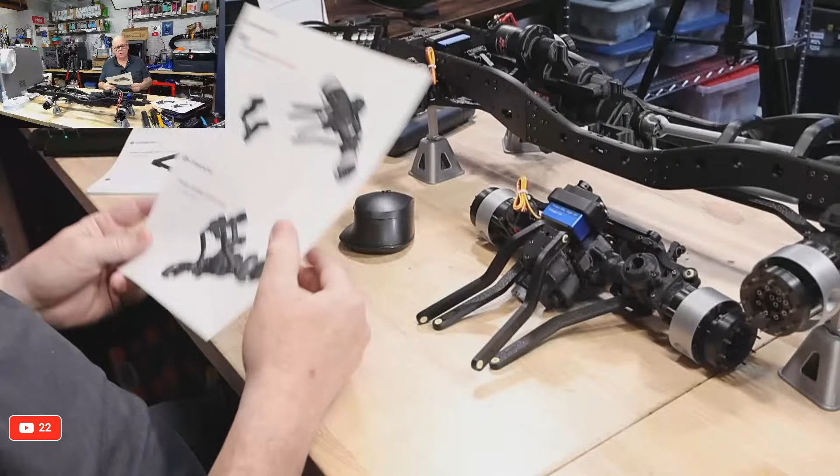Nitwits assemble, yes, let's assemble, let's get some assembly going. Okay, so let's get this camera in place. I've made myself a bit of room, I've cleaned up a few things here because we are going to need room. I was going to bring my Lazy Susan thing from home and I totally forgot to get it, but not a big deal. Okay, let's get the camera over to this one. There we are, we are on page 365, so we are at this point where we are doing the axle installs.

So we've got all this built up to this point. We have the third set of wheels here, and this little thingamadoober piece right here that we're going to attach to these doomer-hickey rods on these little swivel wheel things. So we got all those swivel wheel things done.

You didn't miss much, really. Plus you can always, you didn't miss much, trust me.

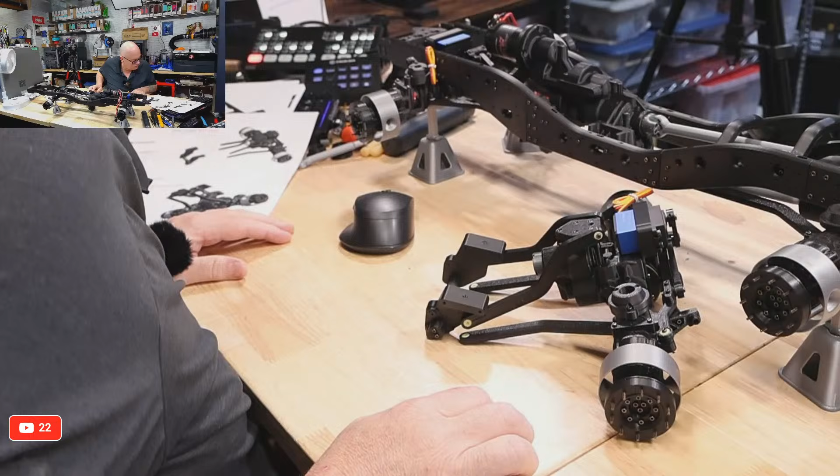Okay, here we go. So this is going in here somehow like this, and then we need to attach using M2x12s. We're putting this one thing underneath, and it's going to go on here.

So I need some M2 by 12s. Oh, I need to get some M2 by 12s out. We're almost out of them here. Let me just put some in my tray. These are 16s. Where's my 12s?

25s, 10s. Sure, it's going to be the second last bag I pick up. You watch. Yeah, of course, second last bag.

M2 by 12s. Let's put some more screws in our tray here. Is the overhead camera going to be better for this one? Let's just check. Yeah, maybe the overhead camera's a good look for now. So we'll dump some screws in here.

There we go. Okay, I'll take an M2 by 12 and my drivers are here and here.

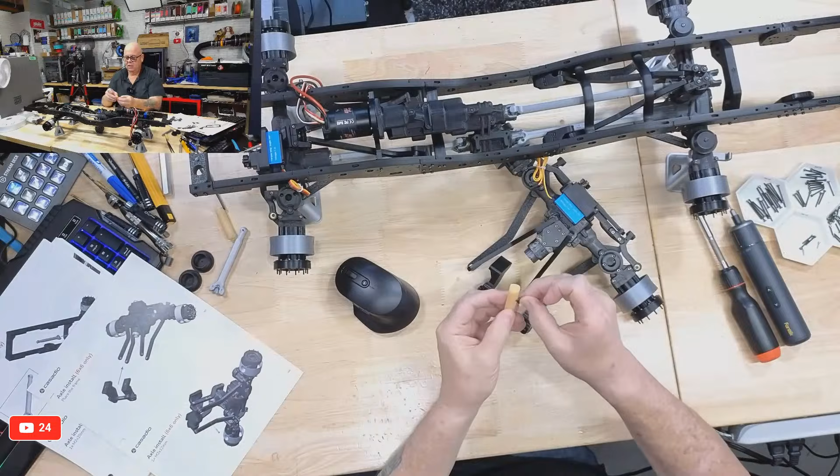There we go. I brought a little wax stick home from the office to see if it'll work. It's the same stick that's used to lubricate the drill when you're drilling holes in paper.

Okay, so this is going to go through here. Oh, I forgot to turn this on. I got something else for this, let me know if it's too loud, but let's see if this is any... there we go. Let me know if that's too loud. I just figure it's better than silence. And I shouldn't get demonetized because it's AI.

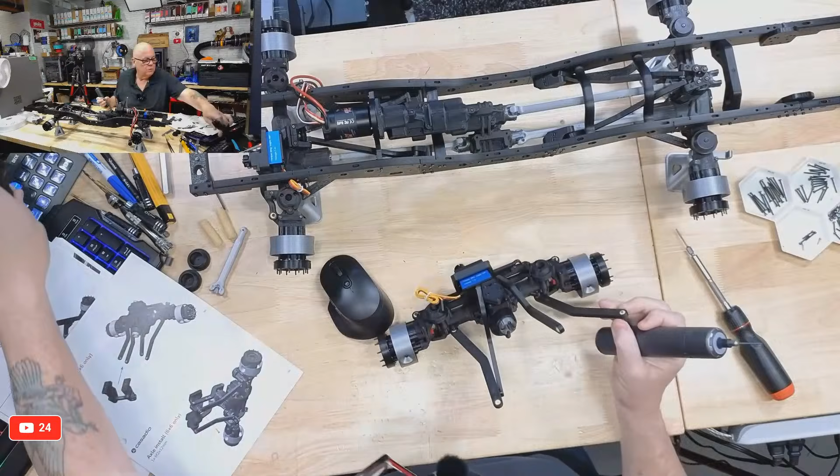Okay, up through there. And we're going to come up through here on this one. Okay, right here. Oops, come on, let's switch over to this camera, might be better. There we go. I should have multiple camera views on it, but that's okay.

Okay, and then it looks like this one is going to go onto this side like this. That's an M2 by 16. Oh, I got to put some 16s in the bag here. Still got tons of these 16s left.

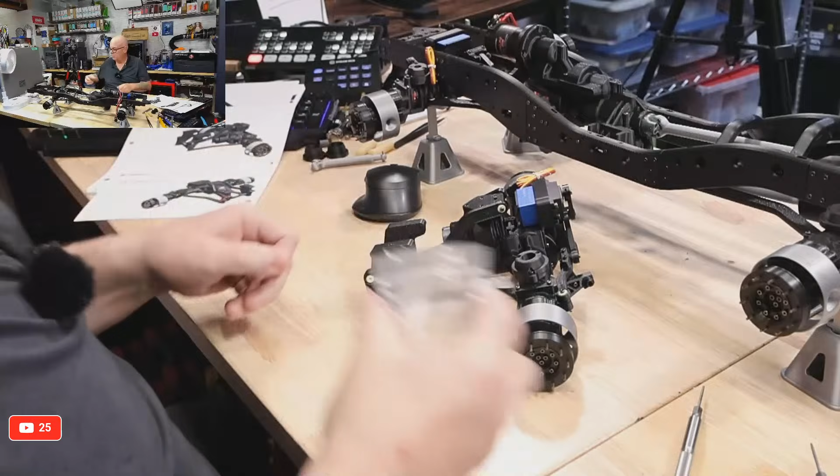Who is this guy? This is me. The new me. The new me.

Okay, 16 millimeter in here. Make sure we hit the hole. There we go.

Whoops. Doesn't appear to be going in. Let me just back this out. Make sure we're going in straight. There we go. That's better. Well, or is it? There it goes.

There we go. That's all in there. We got movement. That's good. Okay, and I think we're going to repeat for the other side. Same thing. Okay, so 12 on the bottom.

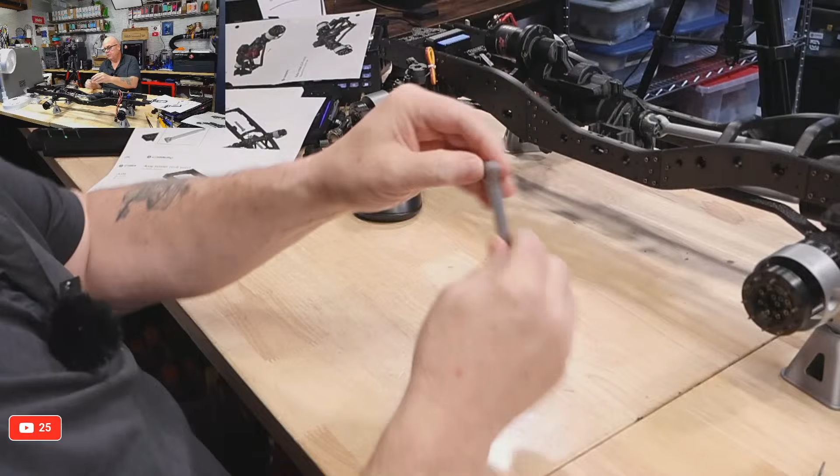reinforcing screw there, which is also going to be used to actually turn it. Okay, so I'm going to get this guy. Let me zoom out if I can on this. Oh, there we go.

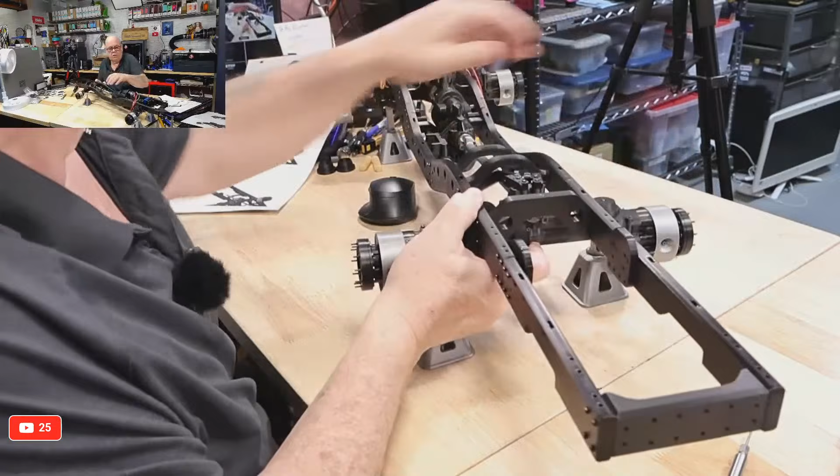Okay, see? So I got to be careful picking these up because these are only held on by a little bit of area. So we move this here. So we're going to be putting the drive shaft onto this

portion here. So I got to turn that so I can see it, and then the drive shaft is going to go. Make sure I get this hole lined up. And I need to make sure that when I put this in, I am in line with the hole, and I am.

Okay, so we need an M2x20 right here. It's got 3D printed jack stands. Yes, it does. Hey, Nick.

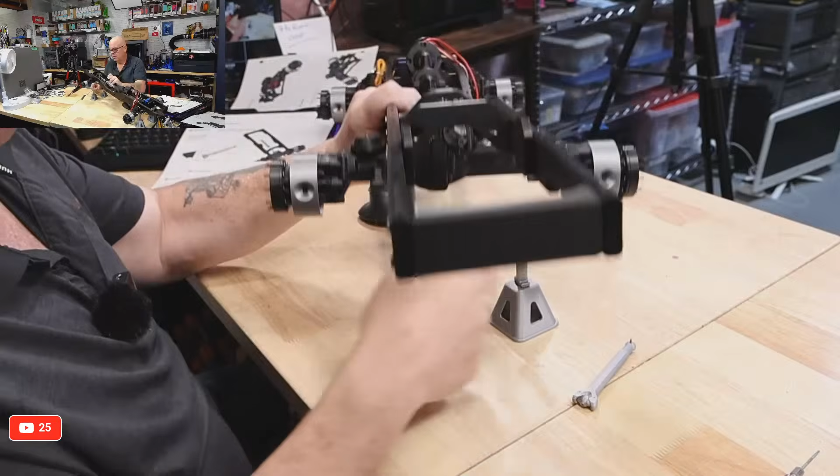Yeah, so basically what I'm doing is if I lift this up, we are attaching the drive shaft to this drive, this hub here, which is the same on the other side, basically, yeah, you get the idea. Okay, let's get this through here, started.

Okay, we got that started in there. It's just a tight squeeze through here, and then we just got to make sure that we have a little rotating nubby piece here. Just got to make sure that that is in proper lined up position. Right about like that, and this should work.

Come on. And I think it went nicely through the hole. Yep.

Perfect. Now we'll just tighten that by hand. Perfect. So there we are. There's the drive shaft in place, just like that. Okay.

Just move that off to the side a bit. So we put the drive shaft in, we've screwed it in.

Now we're going to insert the last set of wheels up, and it looks like we are going to join them with 2 M2x20 screws on each side. And that'll be through these points right here. But we're also going to have to make sure that we have the drive shaft in line. The drive shaft is going to go into this slot here, so we got to make sure that's lined up as we screw those in.

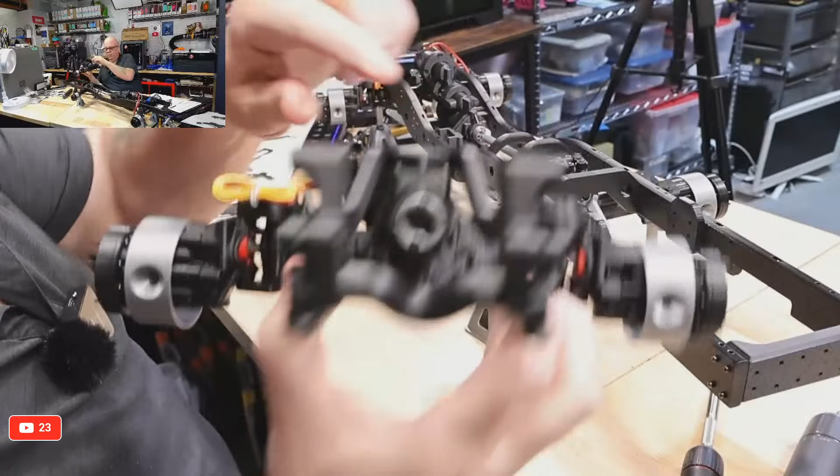So I'm just going to pre-drill, and I've learned this from past experience. We're going to pre-drill these holes. Finished your MOC build a couple days ago, you ended up breaking one. Oh no, breaking one 1.5 bit with your electric screwdriver and also stripped another. Oh wow. Yeah, there's a lot of screws.

So these holes here, we're gonna just make sure these are nicely drilled out for the screws. Okay, and I'm gonna do the same on the other side. I'm gonna come through here, through this one.

There we go. Okay. I wonder if the overhead's going to be better maybe for this. Yeah, maybe the overhead camera will be a little better on this. Whoops. As I say, I'm running out of desk space here, so I'm stealing some real estate from up here. So let's put these jack stands back on here and on here.

There we go. You can just see this a little better this way. Okay. Should have pre-drilled. It helps to pre-drill because then the screws are going to fit through much easier, I find. So we're looking M2 by 20s, and I just like to make sure I get these ready and in place on this side. And I've learned this lesson from putting these other two on. Get these kind of pre-inserted into the holes.

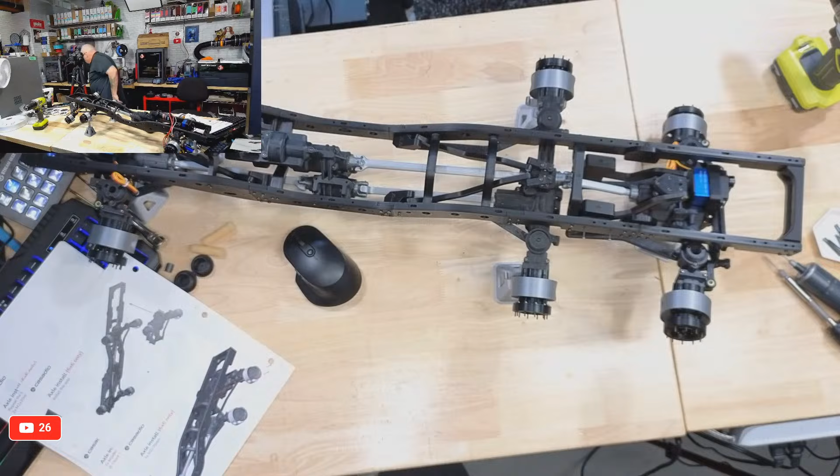Maybe this box. No, not quite. What else do I have? That with this, let's see, this might work. There we go. Everything's just collapsing here.

Okay. Hey, Tuxedo. Yeah, I need another jack stand. Okay, so this is a good height right here.

Now, just gotta line this hole up. Once I get one going, it's all gonna line up nicely. So that's gotta come, there we go. That just had to come back a little more. And get this hole lined up here. And that is lined up.

Okay, get the other hole lined up, which I believe it is. Nope. Too high, too low. Maybe right there. No.

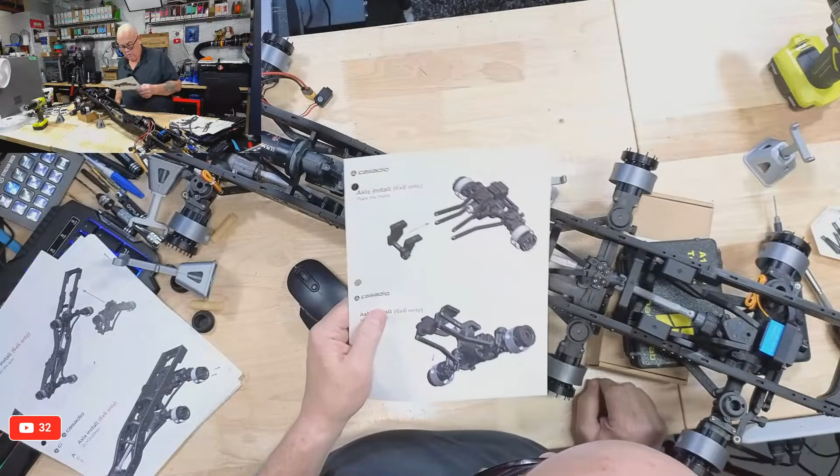Yes, okay, I got it, it's all put together right. This just takes patience. Extra bench space, yeah I know. I could, if I come over here, actually if I move this camera over a little bit that way.

There we go, here let me just angle this better. Oh, wrong way. And if I twist it, wrong way. Let's just do that for now. Okay, I just got to get these back holes lined up.

Where are the... okay, I just got to see something here. Okay, you know, I was off too low. Okay, I was lined up, but I was just too high. Okay, let's do this again.

Patience is key here, trust me, because I'm like, this should be fitting better, but la la la. Patience is key, and you don't want to rush anything, you don't want to break anything. Okay.

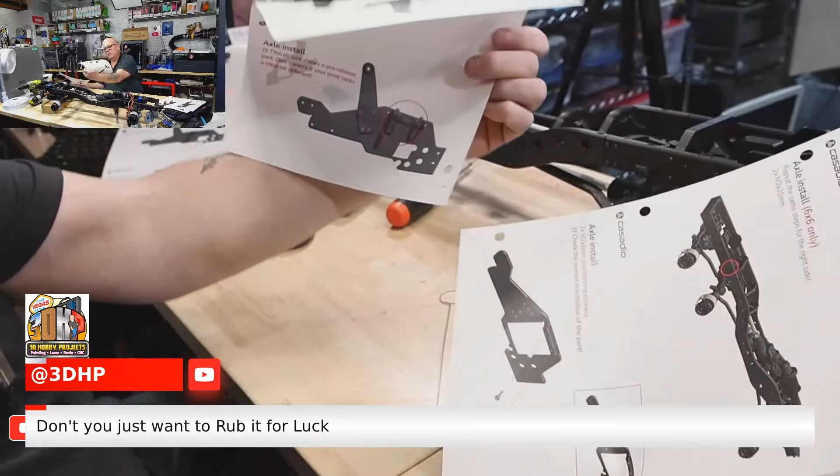We're doing some more fun stuff. So here's what we're doing next. We just finished this top part by putting that last portion in. Now we've got to do, I'm not even sure what this is, but looks like we're assembling, getting another part ready for assembly. So that is going to be in the next bag.

Where is the next bag? Is that this one? The bags seem to be in their numerical order, but the parts that I'm getting are not in the order that they're put in the bags. So what's my next bag in sequence is going to be 30. Yeah, the next bag is 30 and 31, 32. Okay, 30, 31, and 32.

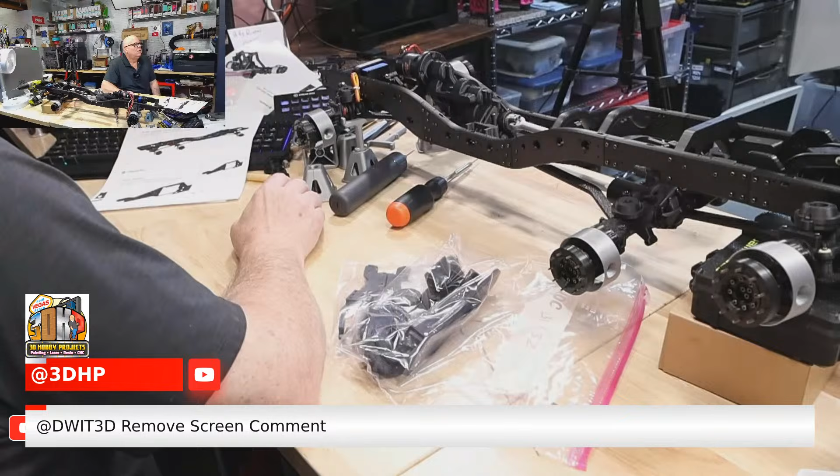Did I leave a pinned post there from Jerry? How did I... I think my mouse just accidentally hit that. I don't even know where that is. I think all I gotta do is show another one to get rid of that. There we go. There we go.

My arm injury, my arm, it fatigues very fast still. Yeah, so my arm injury is still an issue, but hey, I got my MRI scheduled for February 2028, so go figure. Our medical system leaves a lot to be desired.

Okay, we have this piece and this piece from bag 30. Bag 30 of about 100 bags. You gotta be kidding, right? Okay, so it looks like we're gonna work on this piece, and we're probably gonna do the same for both, but anyways, M2x8 reinforcing screws. M2x8. So we're going to do the same on both because I know it always says repeat for the other side.

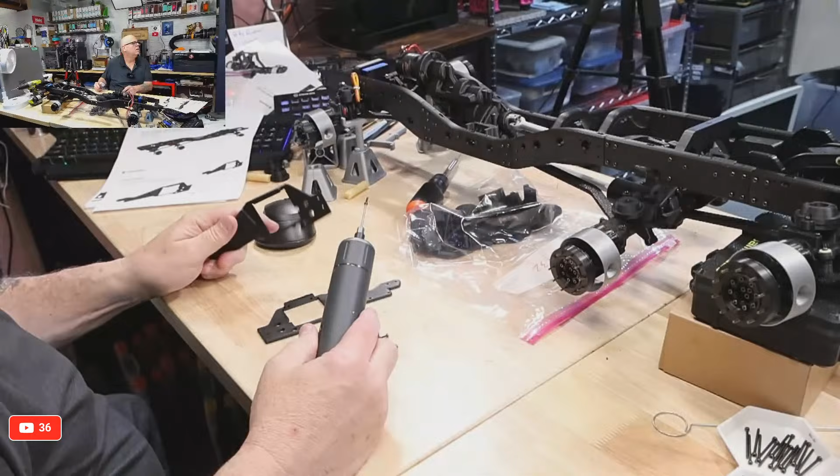They do take a while. Yeah, I agree with you there. That's funny.

800 Northern bagels to make and deliver tonight, tomorrow morning. Shall we see who finishes first? Hey, I think your bagels are going to be done first, Deanna. I really think your bagels will be done first.

Okay, we'll just do the same. I know it's going to say repeat for the other side. Let's see. Follow the same steps for the right side. Yeah, exactly, so we're just going to skip ahead and do that. I love the fact that we put reinforcing screws in the areas that are going to be under stress.

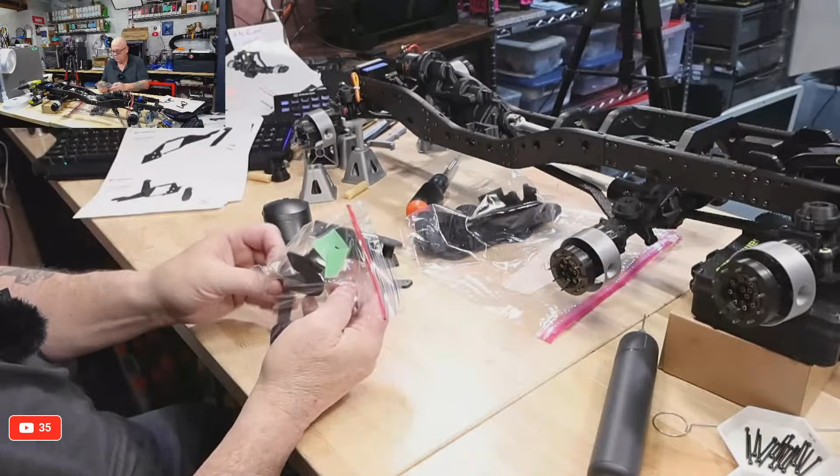Let me see. Okay, and then we have another piece, axle install. Where is that, in bag 30 or was that in bag 23? That was in bag, no, it's not in bag 23. I don't know what bag 23 is for. It seems like we skipped right over bag 23 and on to bag 30. I hope I didn't miss a bag. Can you imagine?

Okay, this is bag 31, 32. So the pieces we're looking for in here are this one and this one. We've got a little bit of, okay, so these are M2x20s. So we'll need 4 of those.

These are going to go opposite side into which holes? Oh, I see those two holes. There's two specific holes they're going into. Okay, let me just make sure. Yeah, I don't need to pre-drill these. These are already easy to get through. So it looks like it's the middle hole and then the middle hole that's on its own. So right through here.

And before I tighten that, that one goes right into here. Okay, and we'll mirror that on this side. So if that looks like that on that, that is going to go that way on this side.

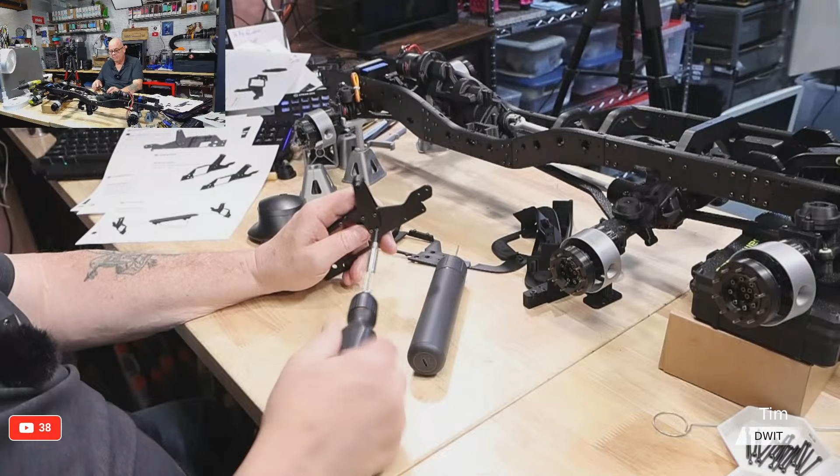Slow, long stretches. Yeah. I've been doing some stretching, not as much as I should, but I use my arm a lot at my full-time job, and it gets so fatigued. Lifting rolls of material, cutting things on the table, installing stuff over my head. My arm gets a lot of workout, but not much chance to rest. Even just these little things like I'm doing right now, the fatigue eventually sets in. And this left hand, oh my gosh, I got carpal tunnel in my left hand. And I refuse to get surgery. So I have a pain cream I use for it. And it gets fatigued a lot. It's not bad now just holding things like this, but sometimes I lose my grip strength, and it's my dominant hand on my phone too, which is I think why I got the carpal tunnel in the first place.

Okay, so that's a mirror of that. I think that's exactly, we got the mirror of that, so that's actually the outside. Okay, I think we're good there. Now we have to take this bridgey looking piece, which is this piece here. Check the correct orientation of the frame. That's not the right piece.

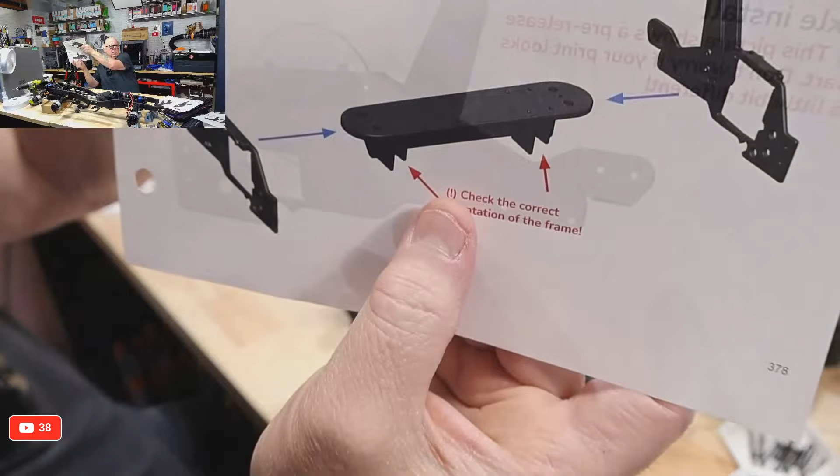At least that doesn't look like the right piece. I wonder if there's a different one. If you look at the instructions, this piece has two bigger holes with a smaller hole in the middle. This doesn't have any holes like that at all. So I have a feeling there might be another piece.

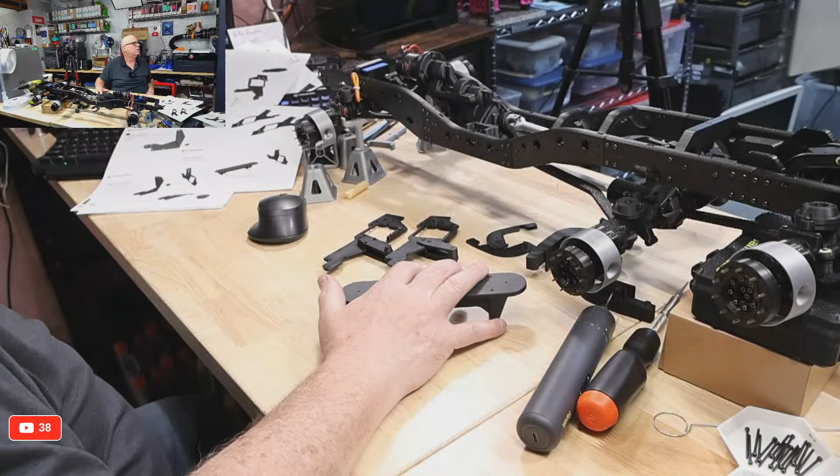Oh, repetitive holding the phone, definitely. You have to go back and print quite a few parts. I was missing some parts, were hiding and turned up. Yeah, I'm hoping that, well, there's one piece here. This is in the same bag, but it does not look like the piece that was printed. But then again, there was a switch to some of the pieces, and this just might have been one of the pieces that was switched. Because why would this piece be in that same bag as those?

So we're checking the orientation, because this is the exact piece, but it's just the holes on the top are different. No, this is different. Well, let's just look and see if I have another.

Let's just look and see if I have another piece. So this piece is different than the piece that's showing in the instructions. And I have a feeling... I just want to check and see if those holes are key.

That middle hole is definitely key. Oh, I see, I think they've changed it a little bit. That's what it looks like, because this is basically the hole that these things are going to plug into, and I believe it's for the springs. That's going to plug into that. I just want to make sure if those outer two holes are being used for something.

I'm just going to quickly check. Yeah, I'm going to just quickly check to see if there's another piece in the bag similar to this. Make sure you use your knees when lifting them up. Yeah, no kidding.

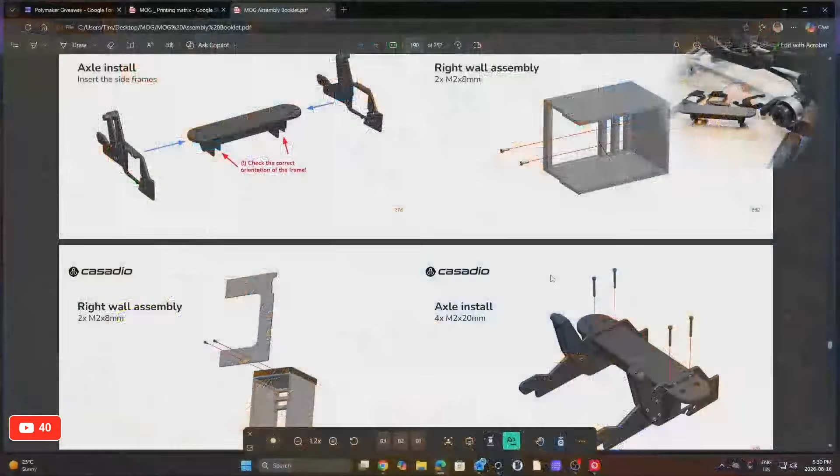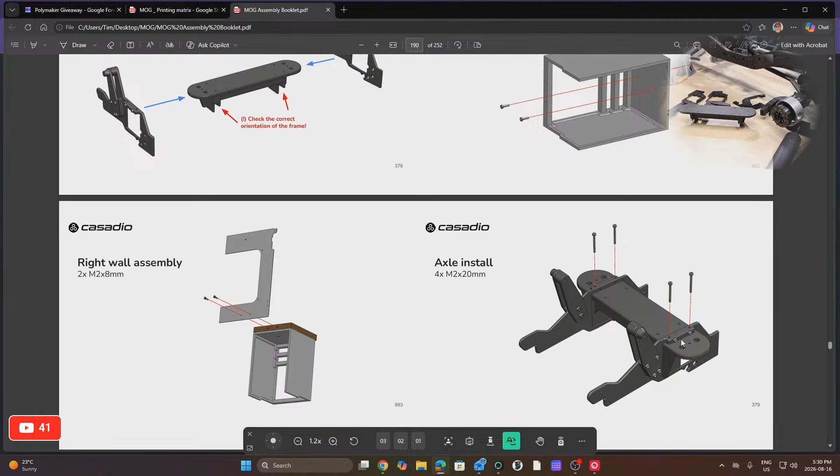Okay, so if I go onto this display here, so you see the part, there's the step I'm at right here. So you see this part they're showing here, it has those two larger holes with a hole in the middle. And then right here again, two larger with a hole in the middle. Let's get back to here. And I'm pretty sure this is definitely not the same as that part at all. So I'm just going to check the next bag and see if that part is in the next bag.

No, I don't see another one like that. No. Let me just check the build plates. Yeah, let me check the build plates and see which bag it was in, the one I'm looking for. That's why I keep these open while I'm doing this. So we go back to this, go to the build plates.

That's 31, which I'm on right now. At least I think that's 30, the one I'm on right now, 31. 30 and 31, yeah, that was in bag 31. Now prior to that, there was nothing that looked like that part. Now let's move ahead a little. And I don't see anything else that looks like that part. No.

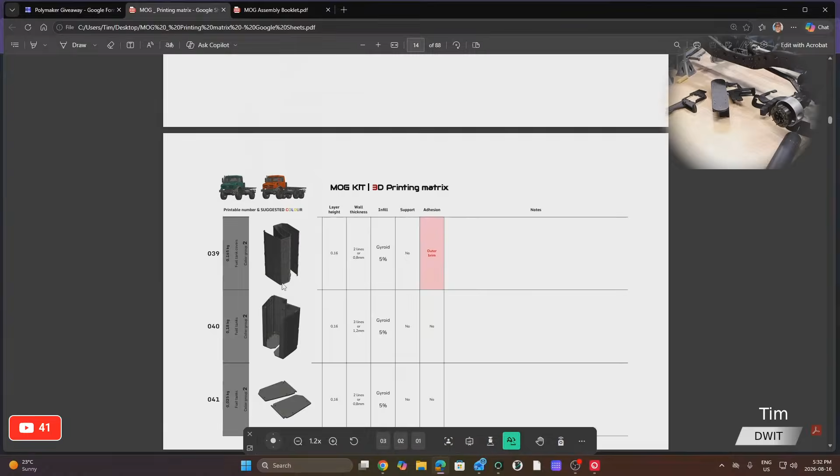Now we're into the body of the truck. So that's got to be the different part. Nothing there, nothing there, nothing there, nothing there. That's the one, bag 31 right there. And even that picture is showing the two larger holes.

But again, they did make some modifications to the model afterwards. And I'm just going to check back on these other ones to make sure. No, so that's definitely got to be the replacement piece, because there was a change. If you downloaded the models before a certain date, you had to update them, and that's probably one of the changes. Okay, so I think that's going to be the right part. They just made a modification to it for some reason. At least that's what I have to assume.

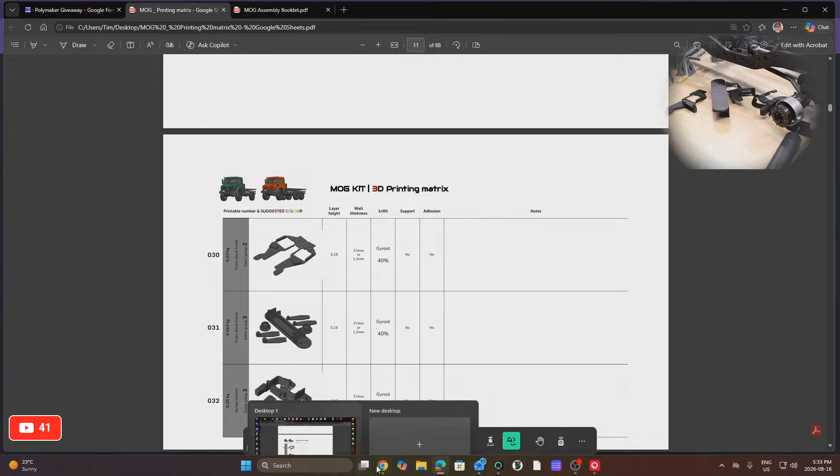Yeah, it looks different than the picture, but you think it's the right one? Yeah, I think that's going to be the right one because there's no other frame pieces similar to this. So we're going with this. We just got to make sure the orientation is right, which is this way.

And we have... which one's going where? So this one's going on this side, and this one's going on this side. Okay, fair enough. We'll go with this and see what happens.

We're going to screw that in with M2 by 20s, four of them. So this is going to go on which holes? This is going to go on the outside holes. There's two sets of holes here too on this one, whereas in the picture... oh yeah, it's the outside, so the inside. So we're going to put this on the outside holes right here.

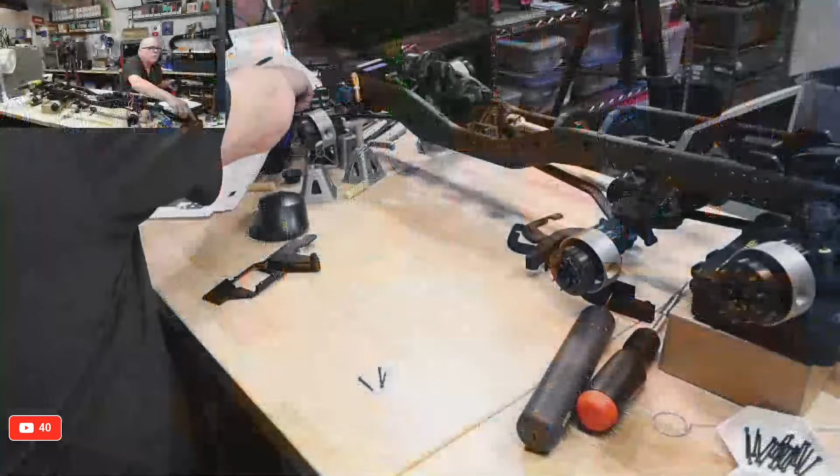Okay, let's get the camera back over here. Here we go. Okay, that's got to be right. We're going to go with this. It has to be.

If I'm wrong, I'm wrong, and I'll admit that I'm wrong. It's probably one of the modifications.

Okay, and this next one just goes on here.

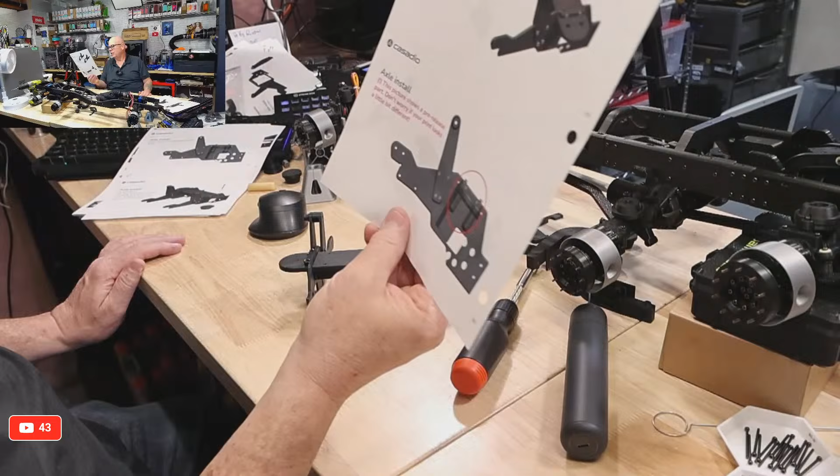Okay, so that's these pieces done, and it says this picture shows a pre-release part. Don't worry if you're... you know what, it really helps to read instructions sometimes. This picture shows a pre-release part, don't worry if your print looks a little different. I was worried my print looked a little different, and it's telling me not to worry. Okay, that was kind of funny.

Basically, it's a giveaway for you. Yes, there you go. Check the correct orientation of the frame, which we just did. So there's what they're showing on top, and there's my frame right there, and the orientation is correct. We have the little bump with the bump-out circle thing and the doomer thingy circle bump-out thing.

Okay, now we're going to put these little bubble things in. I'm pretty sure these are the things holding the springs, attached with M2x20 screws. The long screw gives you the possibility to mount some risers to adjust the preload according to your needs. So M2x20s go down through here, and that's going to go into here. Whoops... into here. Come on. Oh, that's poking right through. There we go.

Pretty sure I didn't... I'm still panicking. Well, not panicking, because I've got bag 23 here, and we're on to bag 34, and we haven't used bag 23 yet. I'm like, did I miss something? I'm going to have to zip back through the instructions a little bit here. I'm nervous that I missed something, but I don't know, my gut tells me I didn't.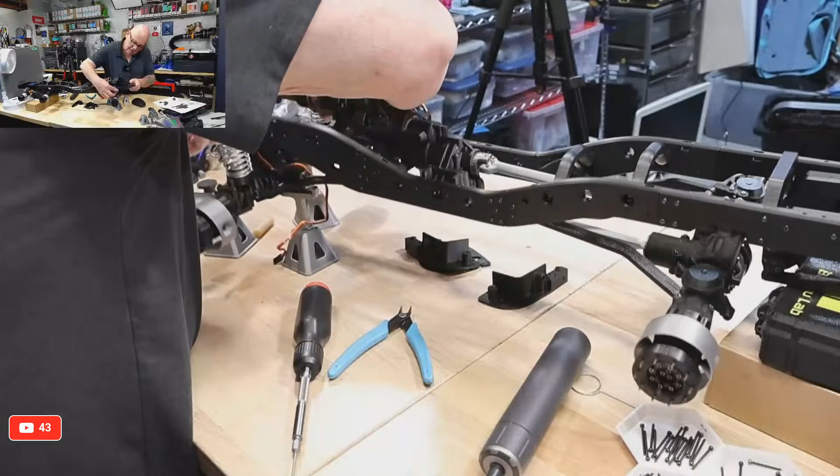Come on, separate. There we go. They're pretty decent springs here. Okay, so compress the spring. There we go. Let's do the other side. And there we go, look at that. There's the shock absorption on that one. Cool, very cool, okay.

Axle install. So we're going to do similar for the other side now. Okay, I can move this aside for a minute. Now that we got the springs in on the back, I assume that's the back of it. Or the front? I have no idea. Because we got a motor, I assume it's the back, but if it's rear wheel drive, then this would be the front. Okay.

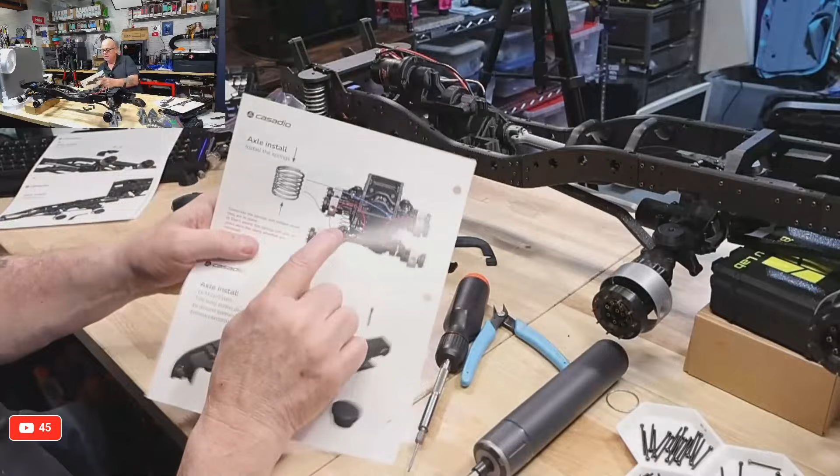So now we need this part and this part. We are now onto, so we put the springs in, right in here. And we're now onto this part down here, which is the axle and the long screw. Gives you the possibility to mount some washers to adjust the preload.

Yeah okay, so we're going to be putting the same thing, 20mm screws into some more spring compressors. These are probably for either the middle or the back ones now. So we have this and this one, and 20mm screws again. You're going to have to put some more 20mm screws in there. And this is going through this part here and into here, like so.

It's starting to come together a little bit now. I'm excited.

Weaponize the MOG. Well, considering the highest class they had was 3 pounds, I think the MOG would be a little bit out of its weight class.

Although they did have, why does that look like it's crooked? Oh, because that is crooked. Okay, they did have a 3 pound one, and it's basically maximum 3 pounds. So they had a 3 pound one, and then they went up against 3 one-pound class robots, and the 3 pound just killed the 1 pound ones, you can imagine, because it had some pretty good weapons on it.

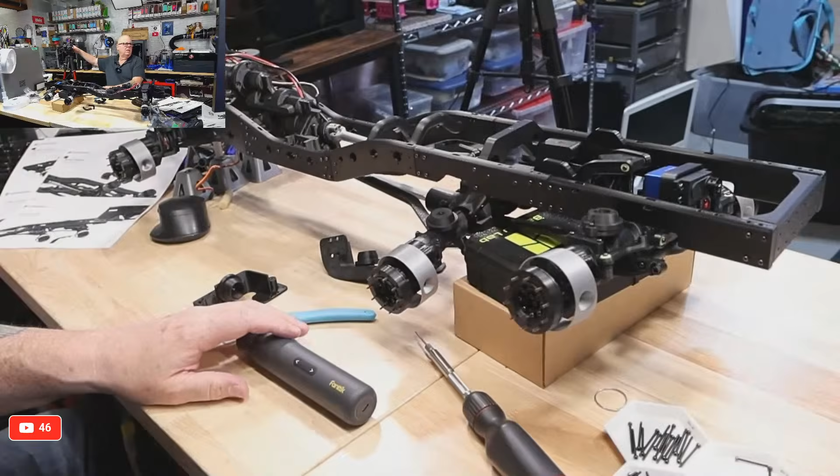Let's move this up again a bit so we can all see this. We're going to have to do both sides. Here we go, so this is going to be right in here. The 4 screw holes are right here. Now let's get a different angle on that. Here we go.

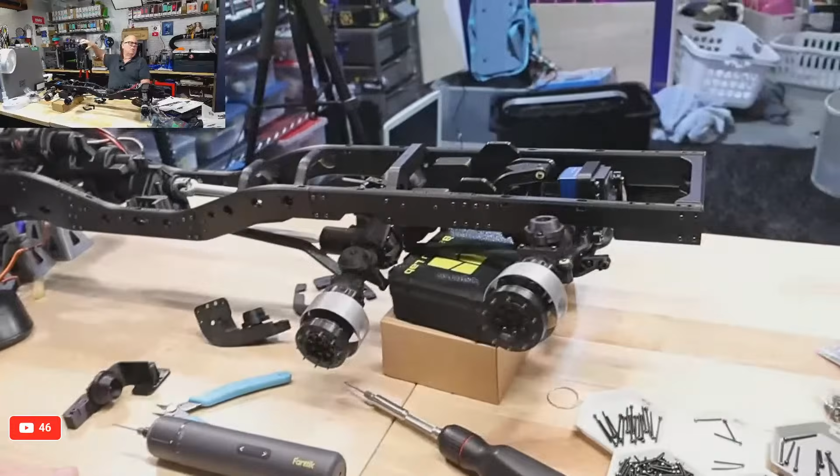There we go, so this is mounting. Let's just make sure I get the right one on the right side here. This is going to go on here just like that. So again, that's where the other springs are going to go, is right in between here. Okay, so that is with M2 by 12s, 4 of them.

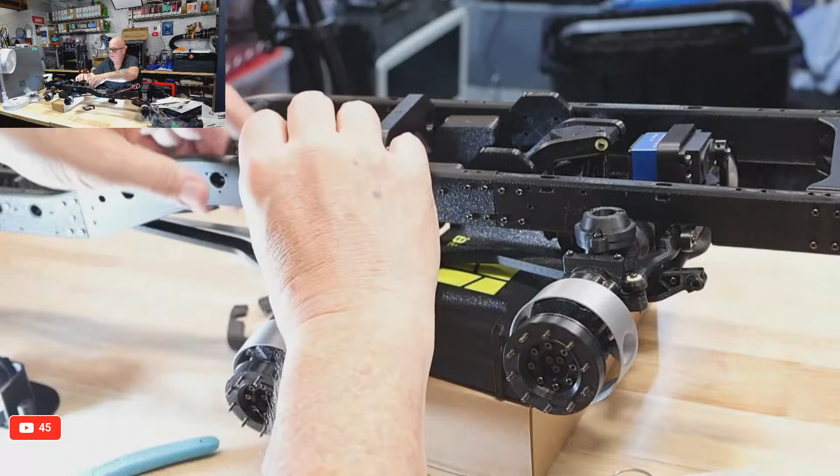Come on. Let me lighten that up a little bit. Yeah, hang on, hang on a minute. There we go. Right there. Come on. There you are. Okay good. Just had to get it started in the hole there. Okay.

The alien abduction lights, are flamethrowers allowed? Well, I think they might have some minor rules against some of those things. But hey, you know, can't hurt to try. I definitely want to get involved in it, but I need to. I have probably most of what I need here to build one, but I would not know where to begin to design one. Now you can get kits, but they're not cheap. So maybe one day I'll save up and get a kit and enter the competition. What the heck, it would be fun.

Oh man, that's hard on the arm. Is it lining up straight? Yes, it may not look straight, but it is straight. Well, it's lining up to the holes. I mean, everything is lining up to the predetermined holes. Oh man, that's hard on this arm. Okay, let's snug these. I have to use my other hand because, oh well, no, I just have to suffer through this. This arm is getting very fatigued.

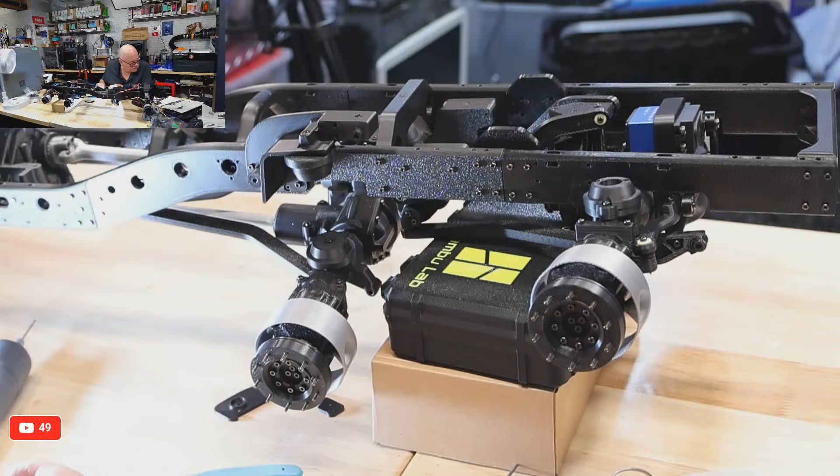Okay, now I'm going to get that one going on there. Now we have these guard pieces here of some sort, so let's see what this is. I know we're just going to have to repeat for the other side. And then this, install the plate.

The plate goes - oh, this plate goes just like this and over here like this. Okay, I see, so there's a plate that goes on the side here.

That gets put in with M2 by 12s. Same thing, 3 M2 by 12s. And then we're just going to obviously repeat the same on the other side. Okay, so let's get these in.

Just think of how long it took him to CAD all this stuff up. Holy crap.

Okay, and this one. Okay, and let's just snug these.

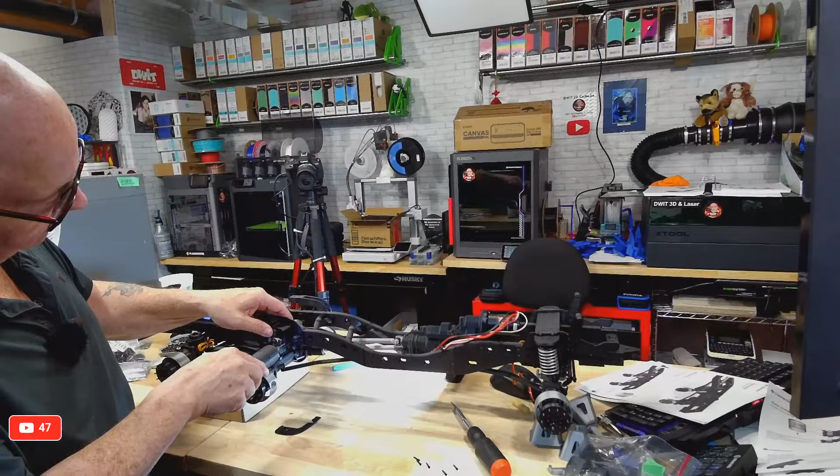Well, I haven't charged this thing all week. I've been using this thing all week, still haven't charged it. This is definitely a great little screwdriver.

I think I'll write to them and say, listen, you need to sponsor me. And they'll just laugh at me. They'll say, yeah, we know it's a good driver.

Okay, now we got the little bumper. It's going to go on right here. Bumper, guard, whatever they call it. Oh, wrong one.

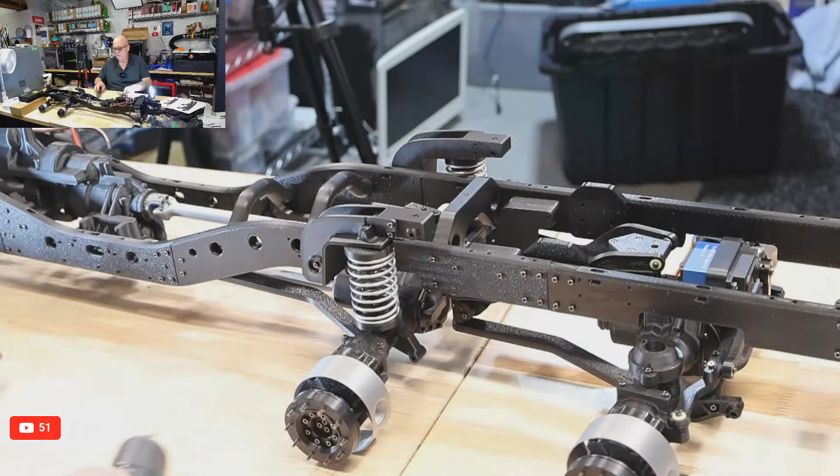Let's go back to this one, and then we can basically get the springs in there. Let's take this off these jack stands now that we got springs. There we go, and we're going to put the other spring over here. There we go. Oh yeah, you can see how that's going to be nice and - you know what I'm trying to say. Okay, cool.

Let's turn that off for now. Okay.

Hey, Matthew Maury, hello. Just looking at the Bambu tool changer patent filing. Very interesting stuff. Oh, I haven't seen that.

Haven't heard about that. Do you have any plans for where you'll first drive this truck, Tim? Probably on the front sidewalk outside my house, or maybe down the back alley where there's a dirt road so it can test the bumps. It's a non-paved alleyway at my house, so maybe back there. Something like that.

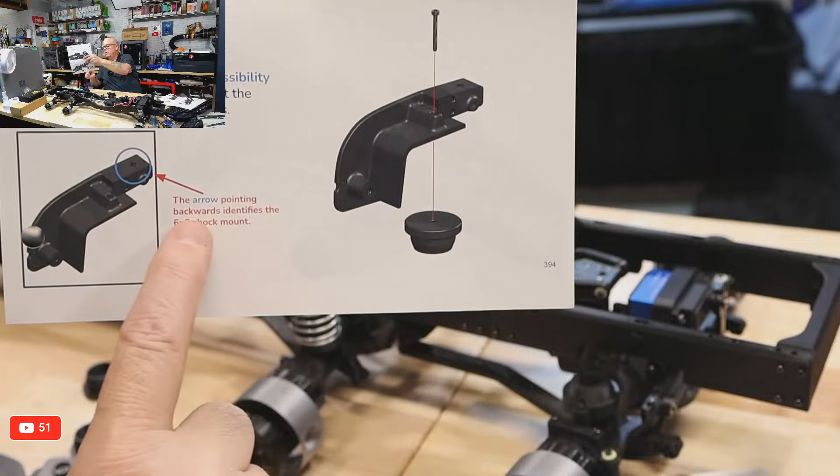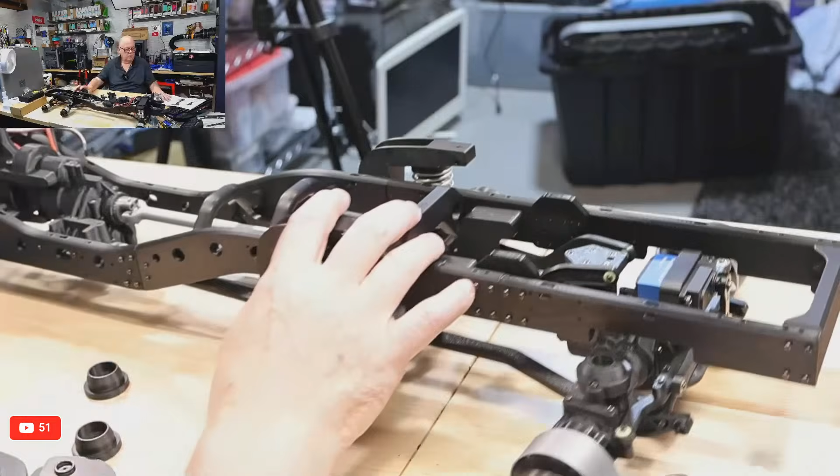Okay, so now we're on to page number 394. We're going to be installing these with the arrow pointing backwards, which identifies a shock mount, which is the back. So we're going to be pointing these to the back and putting M2 by 20s in here, same thing as we did before. We'll zoom this out and do the same thing. M2 by 20s, gonna have to pull a couple more of those out. This goes through this hole here and into these shock mounts.

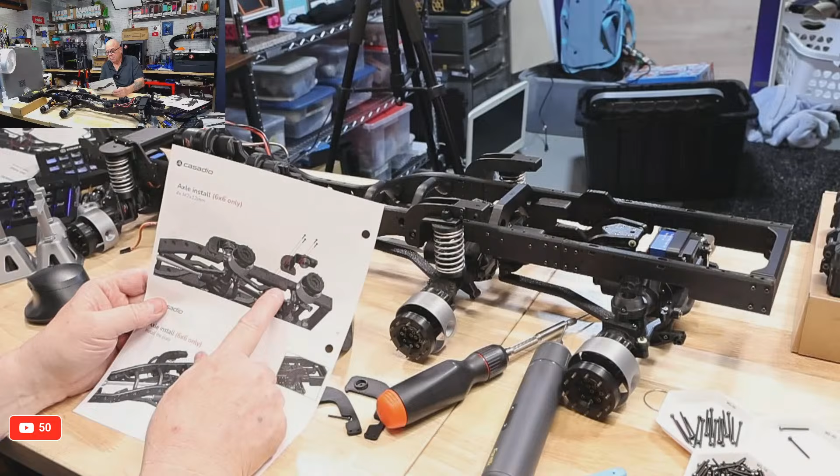Okay, so that's that. Now we're going to mount that with 4 M2 by 12s on the back, on those 4 plates right back here. So those are going in. Let me put my cheater light on again so it's easier to see. Here we go, come on, there we go. So those are going to go in these 4 holes right here. Okay, so we need 4 M2 by 12s. Let's get the first one in here. Come on, so this is going to go in that one.

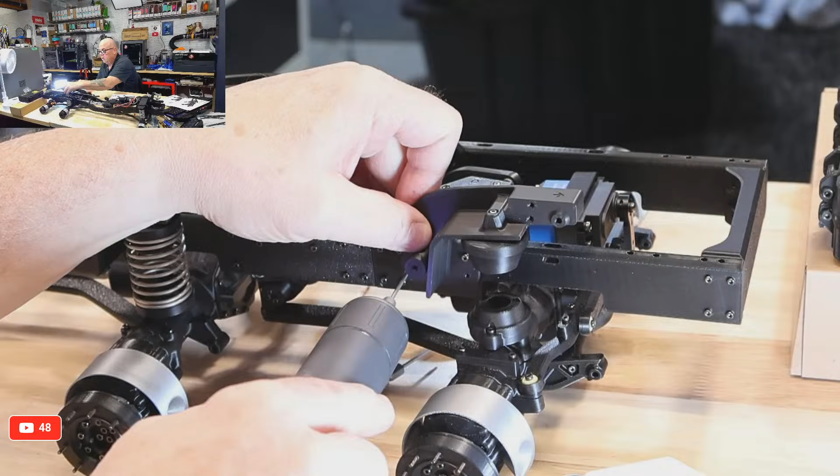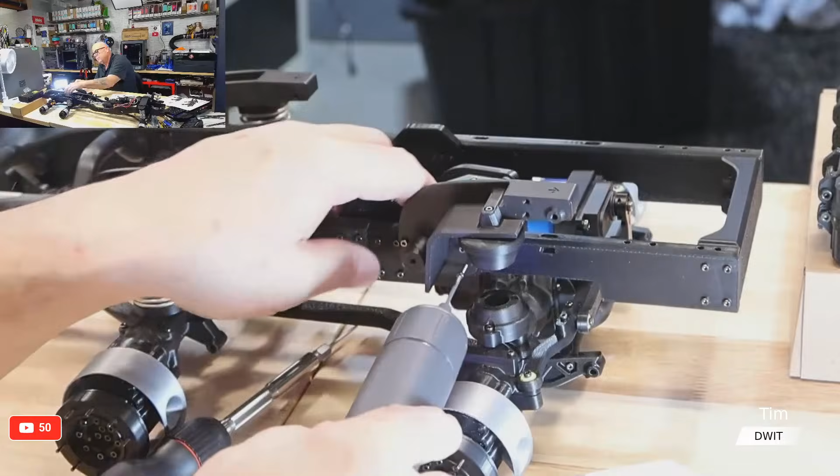And that's not a 12, that's a 16, that's a 20. Whoops. And as always, hand tighten these so I don't strip any plastic. This entire thing is screwing into plastic, there are no heat inserts at all. Can you imagine if you had to put heat inserts in all these things? Oh my goodness, you'd be going nuts. Now we again have this little cover that's going to go on right here, and I believe those are 12 millimeters that are going to go on that one. Let's see, yeah, M2 by 12s on that, 3 of them.

Okay, what is this printed in? PLA.

PLA is fine for all the parts, but the parts that need to be reinforced strongly are reinforced strongly. If you don't put it in any battles, don't leave it out in the sun or exposed in your car, PLA is just fine. A lot of people did different parts out of different materials. I did the flatbed part out of ASA, just because I happened to have some lying around. I think I even did some parts out of PETG, but for the most part I just used PLA.

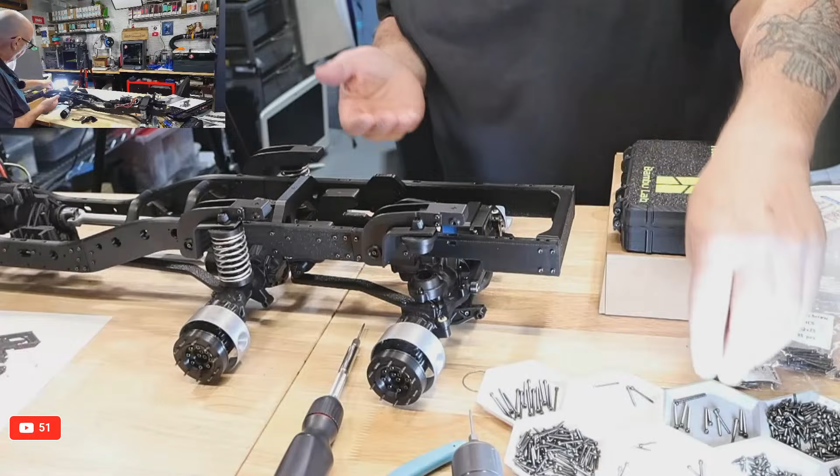Okay, so we need 7 of these M3 by 12s - 1, 2, 3, 4, 5, and 2 is 7. I'm good at math. Okay, my English on the other hand, I don't know, leaves some to be desired. Okay, so we'll start with this one, and that goes in the front hole here.

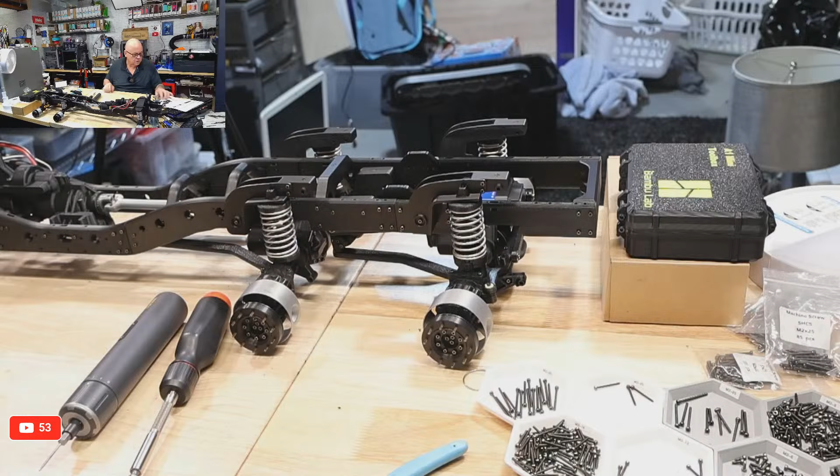Okay, so here we are on to part 4, shocks and bumpers. Now we're going over to page 403. Oh, we actually have some actual instructions - before filling with oil, unscrew the red ring and remove the internal spring. This project does not require it. So we actually have some shock absorbers in here somewhere in this kit, I guess. Let me find them. That must be the oil they're talking about.

Where are the shock absorbers? Let's see - battery, charger... right here, okay. Shocks. We have actual shock absorbers. Cool, this just keeps getting better and better.

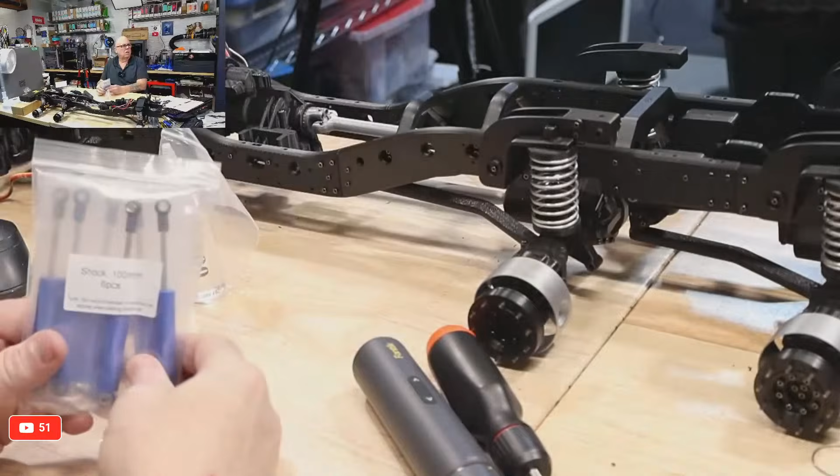After the first 20 pages, you were done with getting started. Yeah, no kidding, right? So I'm going to assume that's the oil they're talking about to fill the shock absorbers. And here are our shock absorbers right here. Whoa, let me scoot the camera a little bit there. So here are the shock absorbers - let's just pull these out of the bag.

Looks like they come in 2 packs, so obviously we're going to need 6. I'm going to need my knife. So 1, 2, and 3 - there we go. So we need to open the shock absorbers before filling. Oh, they're greasy. Oh my God, they're greasy. They're already filled with something, I think. I don't know.

Before filling with oil, unscrew the red ring and remove the internal spring. This project does not require it. I assembled the shocks upside down, but the orientation is up to you. This setup increases the shock wear because the dirt can accumulate on the top of the pipe. Well, I'll do what he suggests. But these are greasy. Okay, so unless the springs are already out and they're already filled with oil. And LDO might have done that with the kit.

There is no springs, there are no springs. So I think, and they're sealed already, I think these are all ready to go as they are. Because these look a little different than the ones in the picture. So I'm pretty sure these are all ready to go. They definitely have some oil in them, but it came with oil, so that's where I'm not sure.

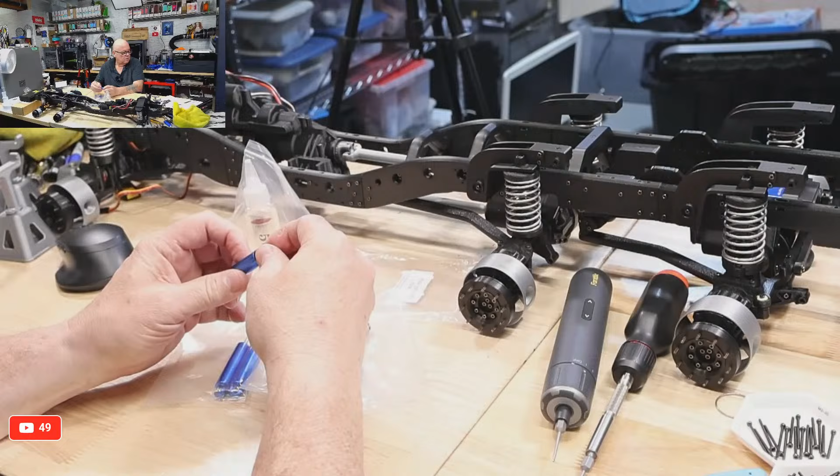Are they all the same length? Yes, they are all the same length. Yeah, they are all the same length. Let's do that, but I just want to confirm that. Okay, let's open the other end and see what we got here. Just want to make sure. Oh no, there is a spring in them.

Okay, so they want the spring removed, and then I assume fill with oil. Before filling with oil, unscrew the red ring and remove the internal spring. It doesn't say when - let's just make sure. No, there's no oil or anything in them now. Okay, I just want to see what it talks about. See, and there's nowhere where it says fill with oil, but it says before filling with oil. So I guess I am to assume that we have to fill these with oil.

Okay, just packing oil, okay. Okay, so this has got to be the oil we're using, because this is definitely oil. Okie doke, and let's just see - if I do this, now fill it with oil. So I guess the oil is going to be, instead of the spring, the oil will be thick enough. I don't know anything about this. Remove the internal spring, okay, let's just see what we do here.

Okay, that's full of oil. There's plenty of oil for all 6 of them. Put this back in. Okay, the oil did runneth over, which is fine. Okay, we'll just clean that up, and the oil should cause it - oh, there we go. So the oil is enough to give it enough shock, I guess, absorption or whatever. But I just want to make sure that it did fill.

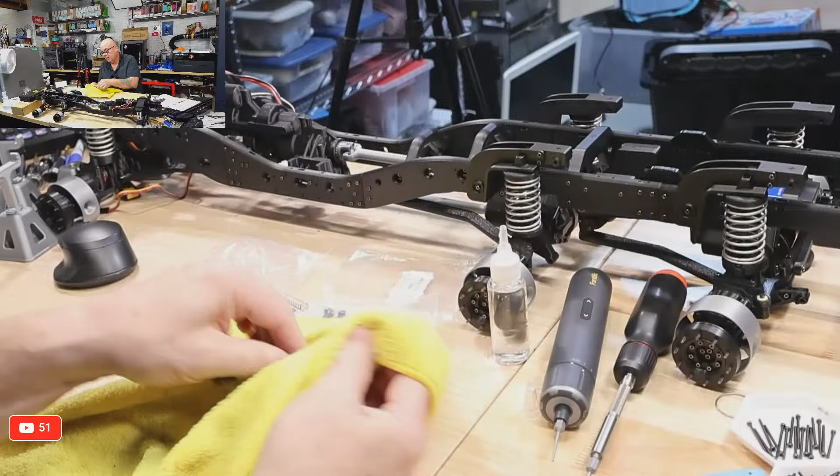Okay, so that's got oil, so I may as well do this to all 6. And then I have some fun little springs to play around with after. Okay, I may as well just do these all. They all have a lot of packing oil on them.

There's a YouTube link in the manual that shows how to do it. Oh, is there? Let's have a look at that. Let's have a look at that. Oh man, first it's grease and now it's oil. Let's have a look at the manual, at the link.

Let's see where I am here. Let's find that spot. And we're zipping up here. Here we are. Oh, I don't see the link. I don't see it.

Oh, that's because this is the manual that I copied. Okay, hang on 1 second. Just let me look for something here for 1 second.

You're hoarding the episodes. I wish I could do that. Oh man, I hate waiting a week, but I do it to myself.

Let me see the official manual. I just want to see if I can find that link. Oh no, that's not the one. That's not the one I'm looking for.

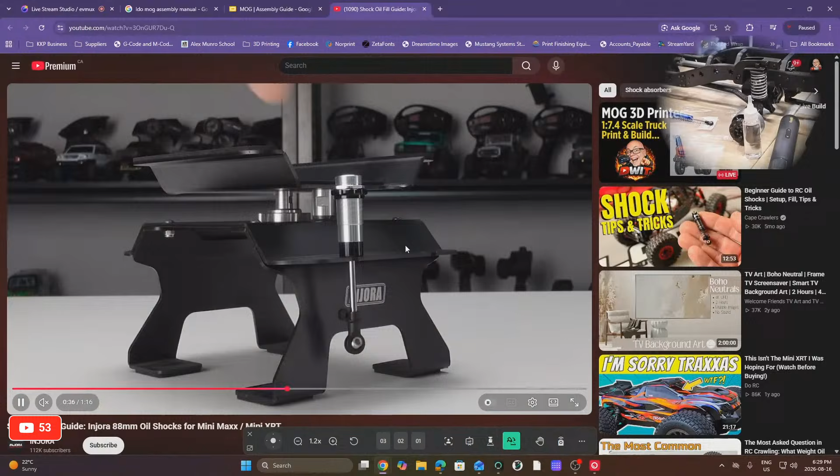And he's filling it full, right up to the top. Yeah. Okay, I see what they're doing. Letting it sit. Okay, and then they're going to top it off. Oh no. Okay.

Okay, we don't have to watch any more of that because, where is my, there we are. Okay, because that's pretty much what I did, except I just didn't let it sit. So let's just do that.

Oh, hang on a second here. Just joined. Oh, okay. $403. Yeah, okay. I've got that. We got that. Good. We're good. Okay. Oh, let's get this opened.

Here, let's switch to this again. We're going to open this up, pop the spring out, and we're going to. Yeah, there's no old oil in it to pour out, really. There's a little bit, but I don't think I need to worry about wiping it because it's just shock oil that's in there. Okay. We'll fill it.

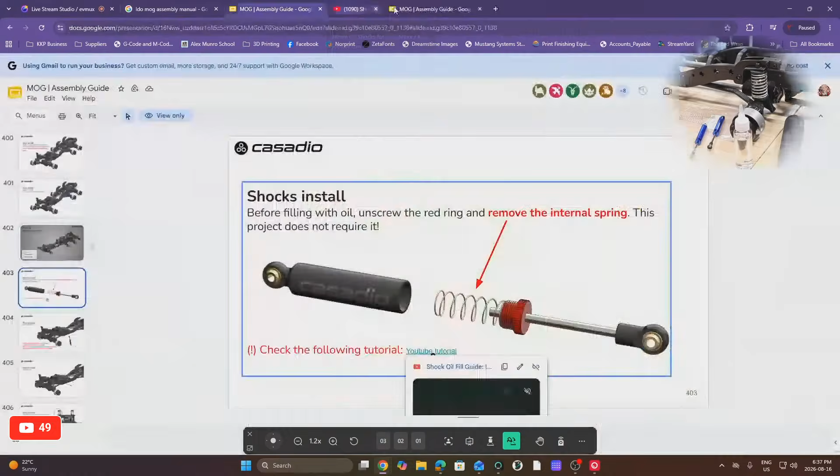Okay, let's just pause that. Let's close that, we've watched it a couple times. Okay, well let's go back to here. Let's see, there's that brand that's in the video. Yeah, I don't know what weight this oil is, it doesn't say anything. It just says 500 CST Falcon, doesn't have any oil weight or anything on it. So...

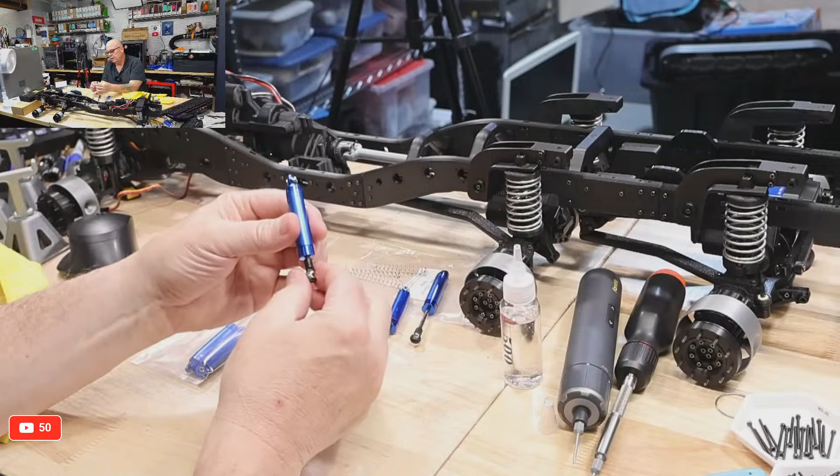But all I know is that when he showed it, he pulled the shock down, it pulled up a bit, he pushed it up, it came down. These are just doing nothing, like there's no resistance or shock absorption there at all, sitting as it is. So let's just see what's going on here. If I pull this back down, we had a lot of oil leak out. So this back full,

I want to make sure we do this right. Okay, and we plunge it up. It's almost overflowing. And we pull it back down. We plunge it up, we pull it back down. He let it sit for a few moments.

Who knows what a few moments is. If I had a place I could sit this without it tipping. Let's just see, and then I'll do another one. Yeah, let's just let that sit. Let that sit right there for a minute. I'll open another one, we'll get this one going too. Okay.

These are slippery. Okay, we'll fill this. Okay. That definitely leaked when I pulled the plunger up. Okay, let's switch with this one.

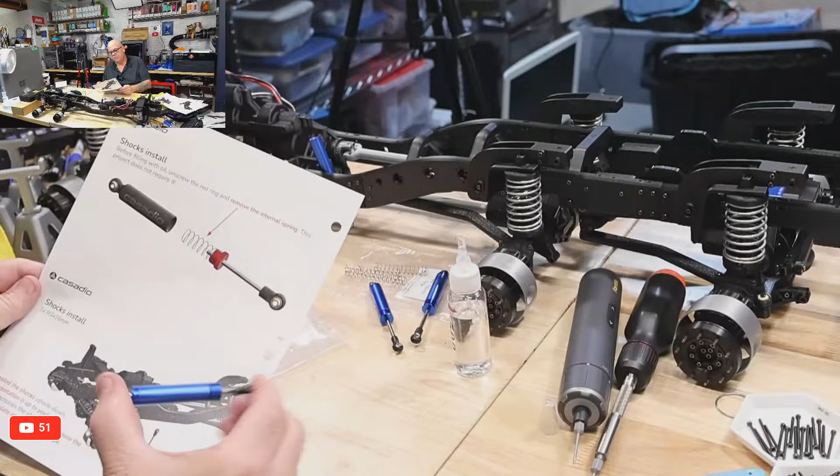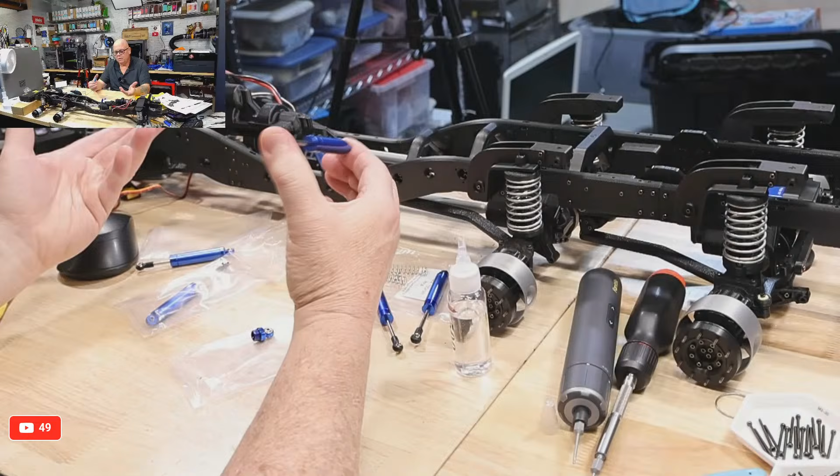I don't know, I'm just so, I don't know. Put the springs back in after oiling, it works better. I would think it would work better, and I just wouldn't need so much oil. Okay, let's see. So the Ranch Kid read somewhere, yeah, and that makes more sense. Nick, didn't you put the springs back in, Nick? Did you put the springs back in?

Let me just dump some of this oil out of here. Now it's singing to me. Now if I put the spring back in, see, to me with the spring it works more like a shock absorber than without the spring. I don't get it.

Okay, what's Rick Hunter got, look at Traxxas's GTR shocks and how to fill. Yeah, I want to make sure this is done right. Anyways, we got to do a draw here soon, and we're coming close to the end of the stream too. But yeah, I want to do this right the first time. So still got lots of oil. Let's just, I'm going to wipe my hands clean of this for now, and we're going to do a draw. And then I'll look at that video.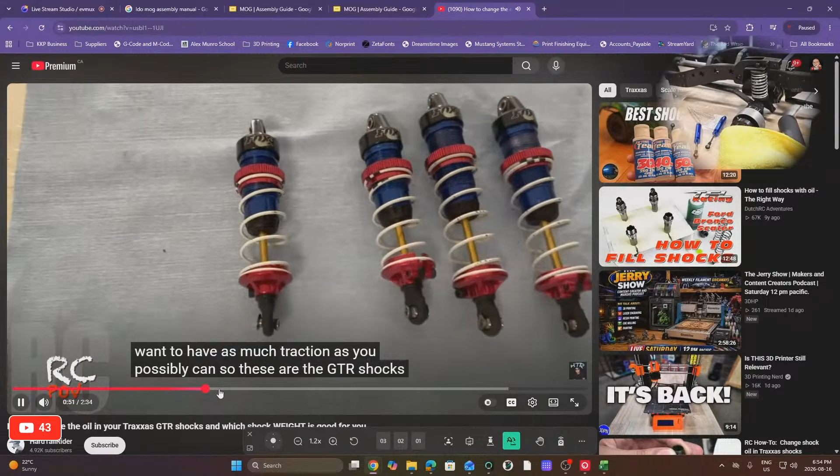So let's get to the... okay. Fair enough. Okay, we'll zip ahead a little. Okay, so dump the old oil out, fill it with oil. An hour, okay.

Yeah, okay, so basically he left the springs on. Okay, it's all in the weight. So it looks like it's all in the weight of the oil and what you need and the result you're looking for. So yeah, there's a link to the Digital Dragon doing the shock oil on the MOG kit.

Oh okay, well let's have a look at that. Let me find that link there, let's have a look at that. Where did my YouTube window go? Can I cut and paste that from here? No I can't. Evmux won't let me do that. Okay, so let's have a look here.

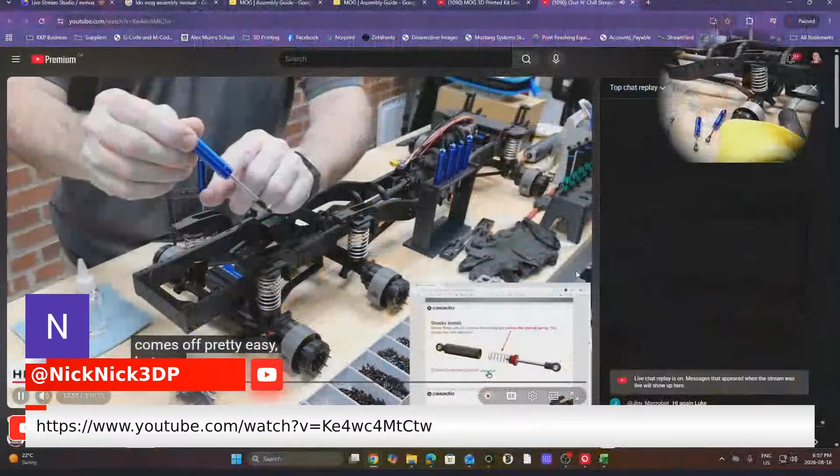Pause that for a minute, let me mute this music. Let them rest, yeah, I'm going to have to do something. Okay, let's have a look at this. Here we are, let's watch this.

Okay, so you took the spring out.

Yeah, there was really nothing in there to dump out worth, yeah.